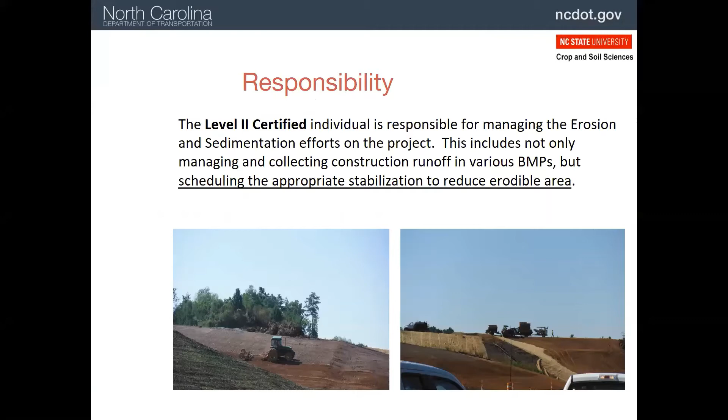So generally the level 2 person is the one who is responsible for ensuring that we get ground covers or vegetation established on areas in which there is no additional grading or there's a temporary stop in grading.

So in terms of how we get this vegetation established, first of all, we know that it's a very good erosion control practice. So that's why most of the non-paved areas around DOT projects will be grassed in order to stabilize and prevent erosion. So the long-term solution is usually a permanent stand of grass or other vegetation. And there can be other types of stabilization such as rock and concrete, but most areas are going to be grassed because that's the least expensive and it's very effective.

We are required by law to cover up slopes that are left exposed during the grading operation. And this has to be done within 7 to 14 days. So for many, many years, we've had to have a ground cover. And as I said, it could be grass, it could be plastic, it could be rock, it could be any number of things, just as long as you're restraining erosion. And then in 2019, we had part of our general permit indicate that we need to have this established within 7 to 14 days.

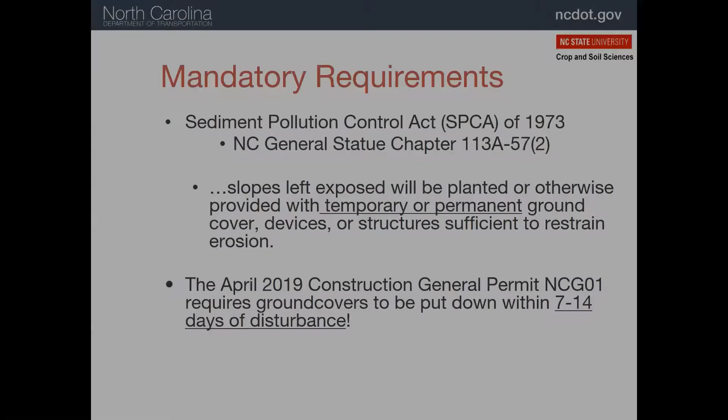So when is it 7 and when is it 14? Well, the high risk areas such as dikes and swales where there's water flowing or the perimeter of the project, those are all going to need to be established within 7 days after the grading is finished on those particular practices. Also, if your project or some part of your project is within a high quality zone, then those waters need to be protected, and we're going to have a 7-day requirement. And that will be on your plans. So whoever made up your plans is going to know what part of or what whole project is within a high quality water zone, such as a lake or a trout stream.

In addition, if we have steep slopes, steeper than 3 to 1, it's going to be a 7-day requirement because those can have a lot of erosion. Unless they're short, like only 10 feet or less, and then you can go with the 14 days. Slopes with 3 to 1 or less slope, those are 14 days unless they're very long, like 50 feet or more, because that can generate a lot of sediment. So those will be 7 days. And everything else is 14 days. So now you know, 7 or 14, those are the 2 time frames.

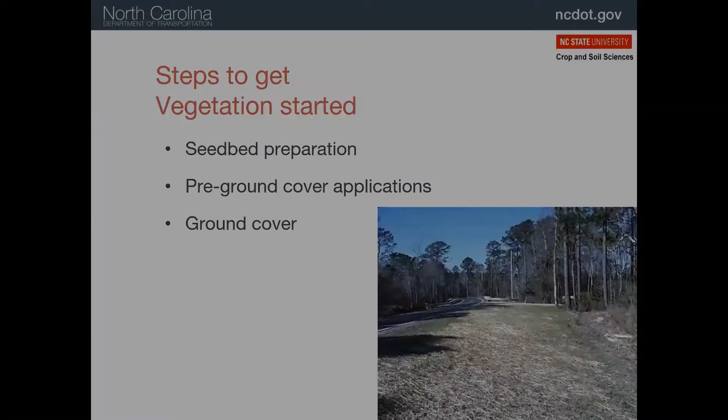So how do we get vegetation established? Well, we have to physically prepare the soil. We have to have certain amendments to the soil or pre-ground cover applications, and then we're going to need some ground cover. So let's go through these steps. First of all, in order to get the soil prepared, we want to smooth out the uneven areas, loosen the soil in some way. So this tractor is dragging a piece of equipment that will loosen up that soil. That allows the seed to germinate and penetrate into the soil.

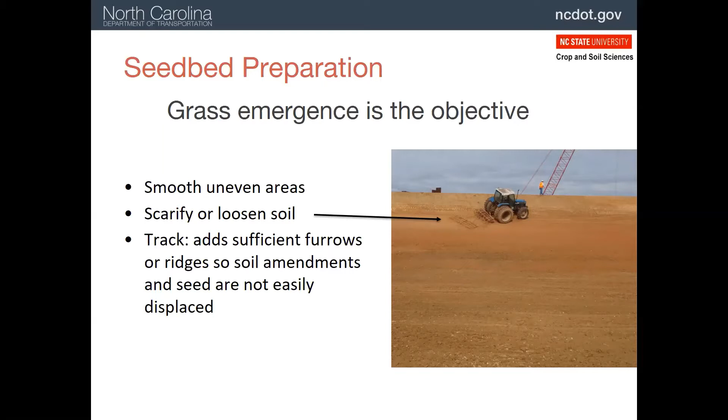And then we want to track. And this is an important process to establish little furrows and ridges, and this will keep erosion from happening by stopping the water from flowing directly down the slope. As you can see, as you track up and down the slope, you leave these little micro ridges, and that keeps the water from flowing too quickly down the slope.

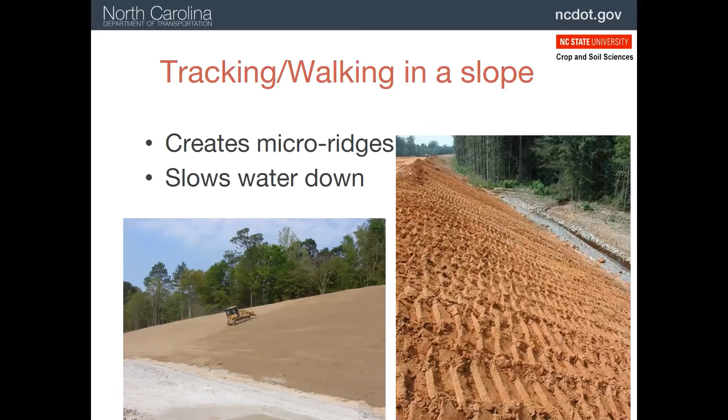So it's very effective. The seed generally will settle down into those little valleys and establish themselves, and we'll get a good stand. Make sure that you track up and down the slope and not across the slope. When you track across the slope, you end up with rills that follow those tracks, and you've actually accelerated erosion instead of slowing it.

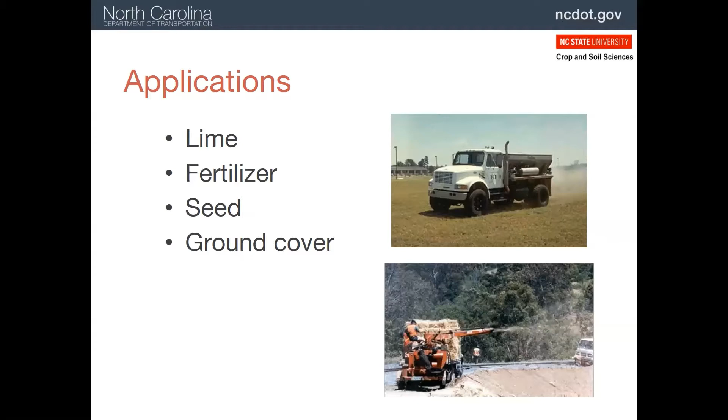Now, we need to amend most soils in North Carolina with lime and fertilizer, and then we add the seed and the ground cover. So let's talk about the lime and the fertilizer. Why do we lime in North Carolina? Well, most of our soils are acidic, meaning they have a pH of 5 or even lower. And in that case, plants just cannot grow, especially grasses. So we add lime and that brings up the pH, and we no longer have the toxicity of the aluminum in the soil, and the plants are able to grow.

We go with this blanket application of 2 tons or 4,000 pounds per acre. Now, there may be areas that need more, some that need less, but this will generally get the pH up to a point where the grass can grow. Whether you use powdered or pelleted doesn't matter. Powdered is better in terms of reaction in the soil, but pelleted is okay as well.

This particular blend is unusual, but it's helpful in establishing grass without having a rapid growth that you might want, say, in a lawn or on a golf course. So it helps the grass become established, but it doesn't need to be growing really fast and with a deep dark green.

So how much do we apply? We're going to go with 500 pounds per acre. So relatively low rate compared to lawn or other applications, but it's enough to get the grass established, and that's all we need is to get the grass established so it prevents erosion.

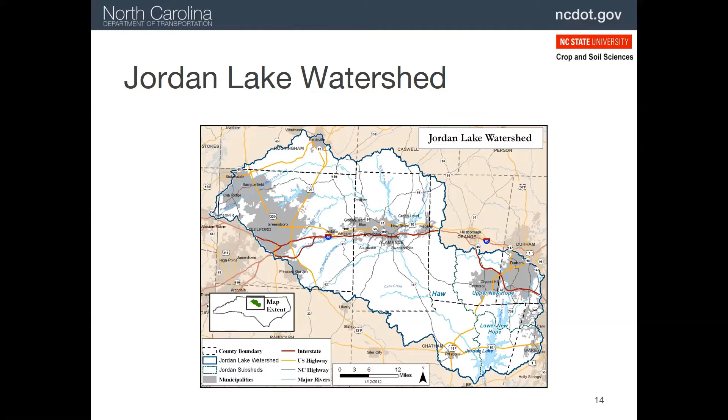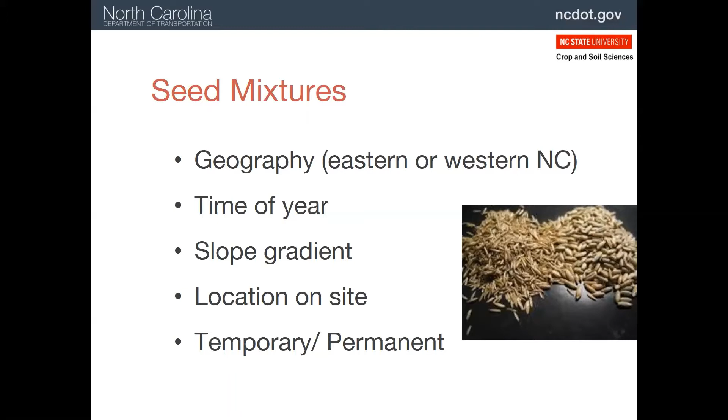All right, so we talked about fixing the soil physically and then chemically with lime and fertilizer. So now it's time to put out the seed. Now, the type of seed that you apply depends on where you are in the state, the time of year, what kind of a slope or area it is, and whether this is a temporary or permanent seeding. So we're going to go through all these different options for seeding.

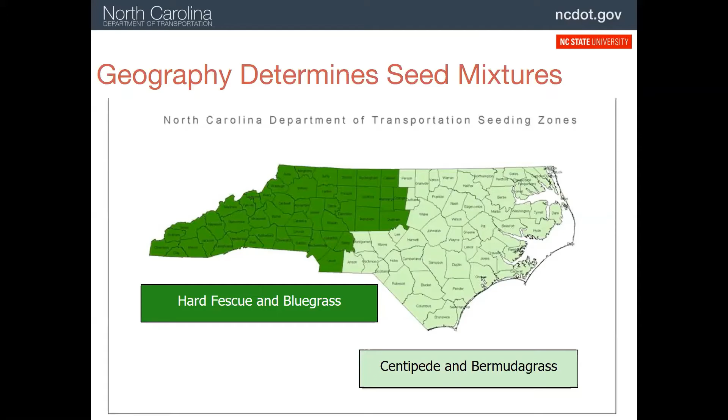So here we're going to go through some scenarios to give you an idea of how we would pick seeds. For example, Division 2, which is down east, and we finished our grading and it's April, time to put out some seed. We would put out 50 pounds of tall fescue. That's going to be sort of a nurse crop. We'd also then put out centipede and 25 pounds of Bermuda grass. Those are the warm season grasses that are going to be permanent.

So notice how we've said here a hulled Bermuda grass. So the seed naturally of Bermuda grass has a hard outer casing that helps it survive over the winter. However, if you apply it with a casing in the spring, that'll delay its germination. So in the warm parts of the year, we use hulled Bermuda grass. All right, and as I mentioned, the fescue, we already talked about how that's a cool season grass. It will grow in eastern North Carolina, but it's probably going to die out and the area will be taken over by Bermuda grass.

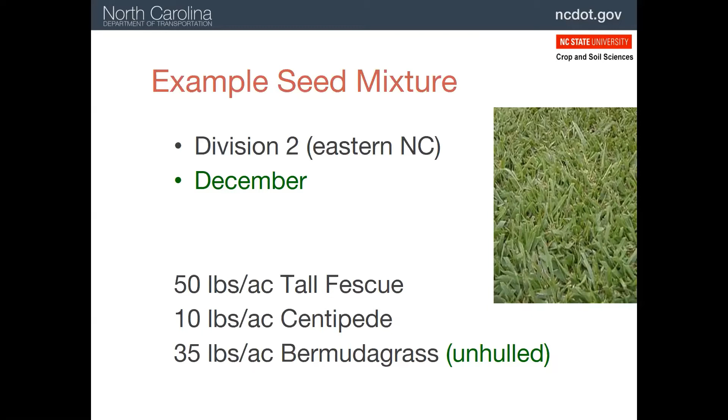Same area, we've had a delay. We're not finished grading until December now. So we're going to still use the fescue and the centipede and the Bermuda grass. However, we're going to use unhulled Bermuda grass. So the seed has not had the outer casing removed because we need that seed to survive the whole winter. So it's a little bit different mix, 35 pounds instead of 25, because we're probably going to lose some of that seed over the course of the winter.

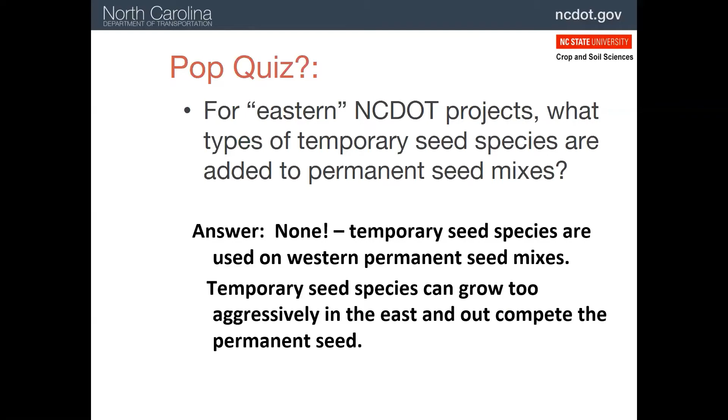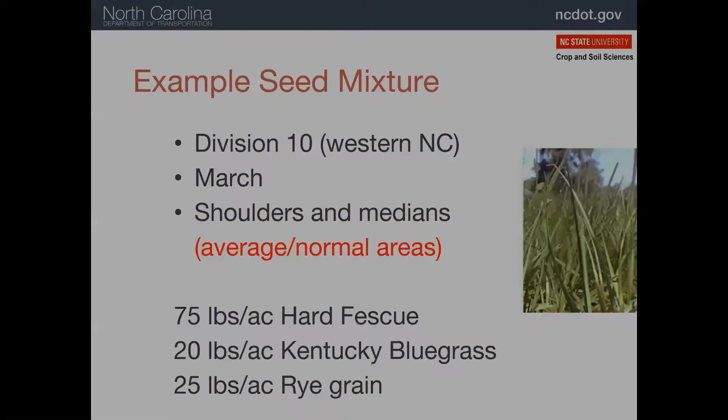So if you haven't seen the rye grain, you can see it right here. Very tall, it grows quickly, forms a seed head, but then it dies out and the seed never germinates. So it's a great nurse crop for the other species.

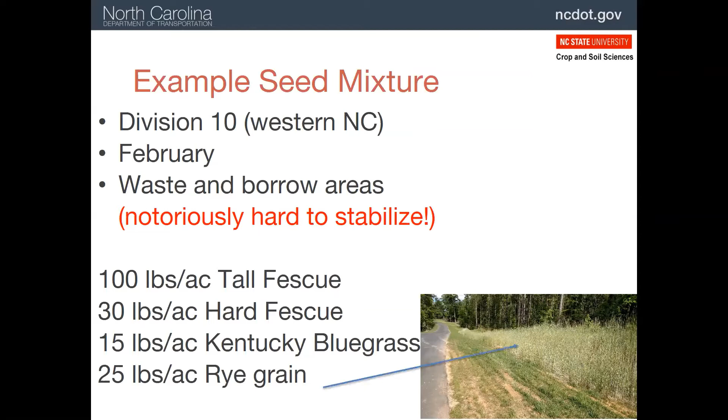Now, if we're in areas that are usually near wetlands or other bodies of water, we're going to go back with native seeding. And the reason we use native grasses is because this area has a lot more wildlife than we expect on other areas. So 50 feet on each side of streams and wetlands, we're probably going to be putting out native grass seedings.

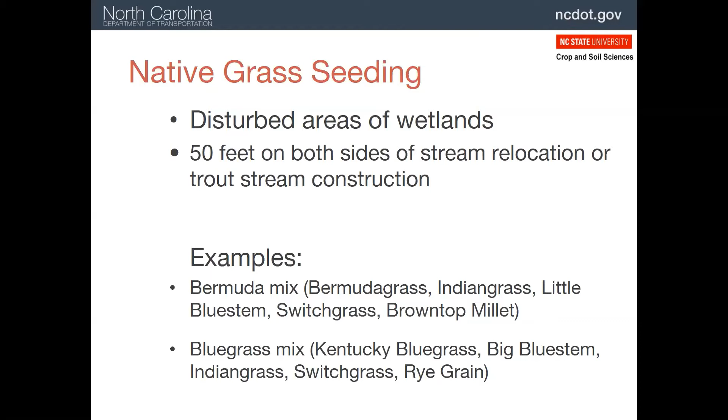So down east, that would be Bermuda with Indian grass, little bluestem, switchgrass, and millet. And in the cool season areas, we'd be using the Kentucky bluegrass with big bluestem, etc. So different seed mixes. These are very expensive. They're slow to establish, but we want to plant natives where we expect to see a lot of wildlife.

All right, so what are some of the problems we run into when we are trying to get vegetation established? One is inadequate cover, not enough of the cover material, whatever it is. For instance, straw. Didn't put enough straw out to protect the seeds. Poor seedbed preparation, that is compacted soil that has not been roughed up and scarified, or not enough amendments, didn't put enough of that lime or fertilizer out to correct the pH and get the fertility up.

Or you may have seed that's dead, essentially. It's expired. So every bag of seed is going to have a tag on it with a date, and that will be given to the inspector to ensure that you're using the most recent seed that you can get.

So we've talked about how we fix the soil physically and chemically, put out the seed, and how we select the seed. So now we need to protect the seed. So let's talk about different types of ground cover. Our standards would be straw mulch or erosion control blankets. And in some areas, particularly on steep areas or where there's water flowing, we might use a permanent soil reinforcement mat. There's other materials available like hydraulically applied mulch, or what we normally call hydromulch. Compost sometimes is used in small areas. And then we can add polyacrylamide to the mix to reduce erosion. And we'll talk about each of these in detail.

So the straw needs to be put out at 1 to 2 tons per acre, sometimes more. But the key is you need to get 85 to 95% coverage in order to protect the seed and get a good stand established. This is for slopes that are 2 to 1 or flatter. So steeper slopes need to have blankets or hydromulch. It needs to be uniformly spread, of course. If it's too thick in one area, it may kill the grass. And of course, if it's too thin, it doesn't protect the seed. So make sure there's enough to cover the area.

Straw actually has a lot of good properties if it's put out properly. It shades, it reduces erosion, holds the moisture for the seeds, allows circulation so we don't have diseases, and sunlight can penetrate in those little crevices in between the straws.

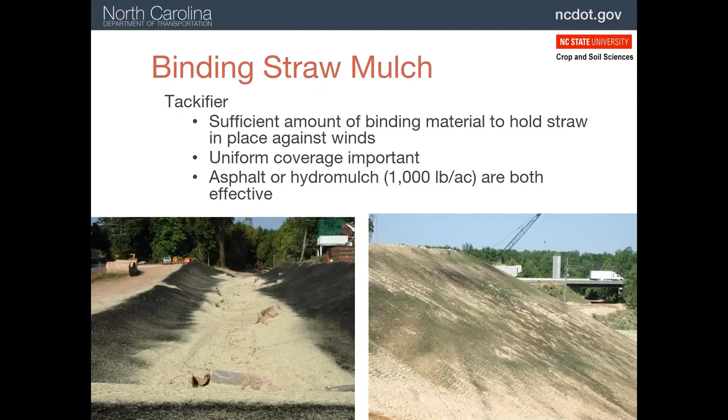However, straw has a tendency to blow off where you've applied it if you don't apply a tackifier. So often we will put out an asphalt material. We're transitioning to hydromulches at a low rate, and we'll get to hydromulches in just a minute, but those are very effective at holding the straw. There's other materials as well, but the key is to bind it together and hold it in place until the grass can get established.

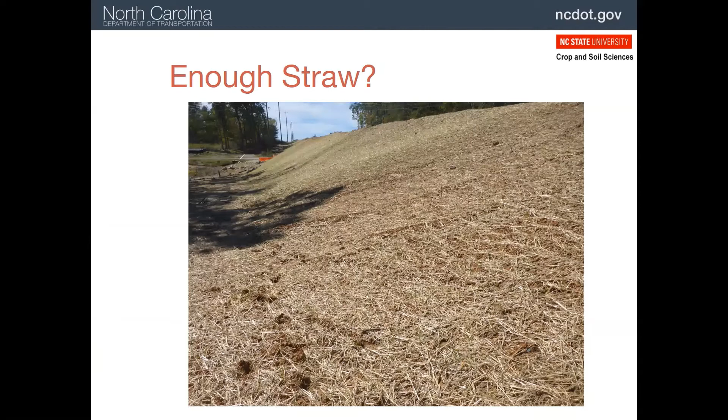Did we put enough straw out on this particular site? Well, if you look sideways, it might look like it. But when you get up close and you look down, you can see that there's a lot of soil showing, and that's a big problem. All the seed that's in those areas where it's bare is probably going to die. It's not going to be able to survive dry periods in between rainfall events. So this is probably less than half the amount of straw that you need to have to protect the seed.

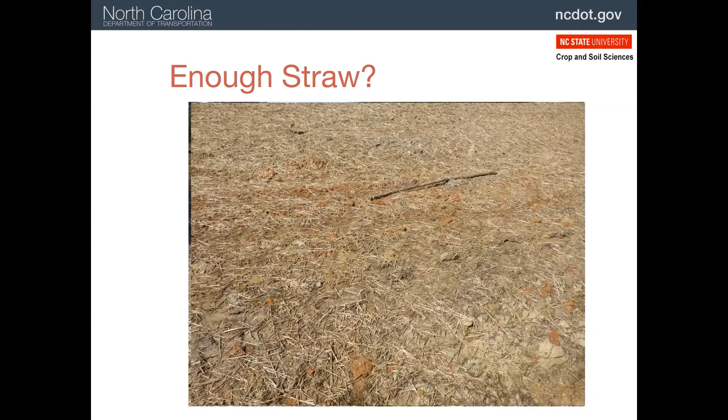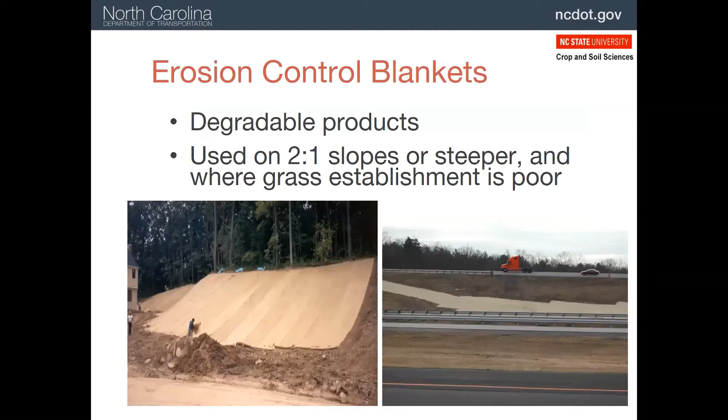There are many different kinds of erosion control products. Typically for DOT projects, they're made out of an Excelsior product. That's a curled wood fiber. You see the blankets in these pictures are Excelsior blankets. They can be on 2 to 1 slopes or steeper, or where we've had trouble establishing grass, which you can see on the highway on the right.

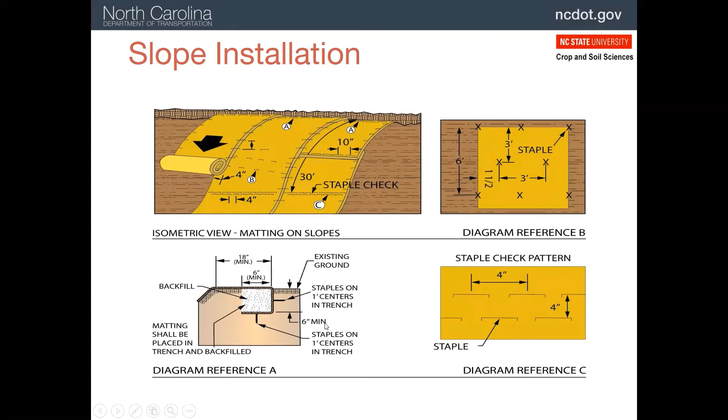If you're in a ditch, then you may be needing to do additional measures. For instance, as the blanket ends, you need to make sure the next blanket is underneath the uphill blanket so that water can't get underneath it. Again, stapling through both blankets to hold them in place. Very critical to have overlap between the blankets going down the slope so that water can't get underneath that either. So very critical that we get this installed correctly where there's flowing water.

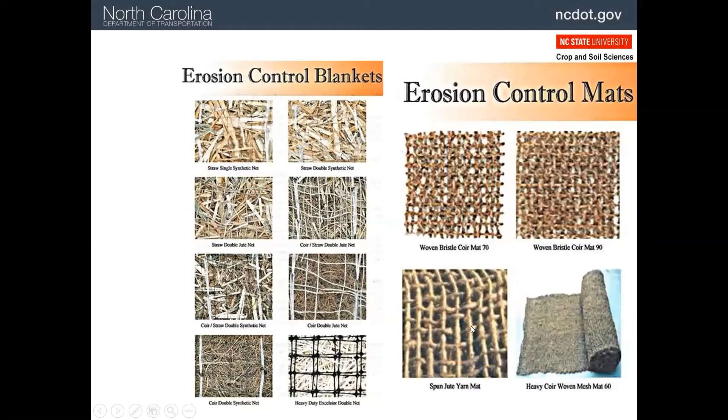There are many, many different kinds of erosion control blankets. On the left, you see many with a netting of some kind or another. Sometimes it's plastic, sometimes it's a fiber material. On the right, these are made out of a coconut or coir material. They do not have a netting. They actually are just woven together. And these are used mostly around streams.

As I said, the coconut fiber mattings are used around streams. That's primarily because they last a long time. They're made out of the same material that doormats are made out of sometimes. And again, it's because they are very rot resistant. They will eventually degrade, but it may take 3 years, 5 years before they are disappearing. And by then, hopefully there's vegetation all coming up through those blankets. Excelsior, as I mentioned, is the most common we see on DOT projects. There are straw blankets. They're the least expensive that are also out there.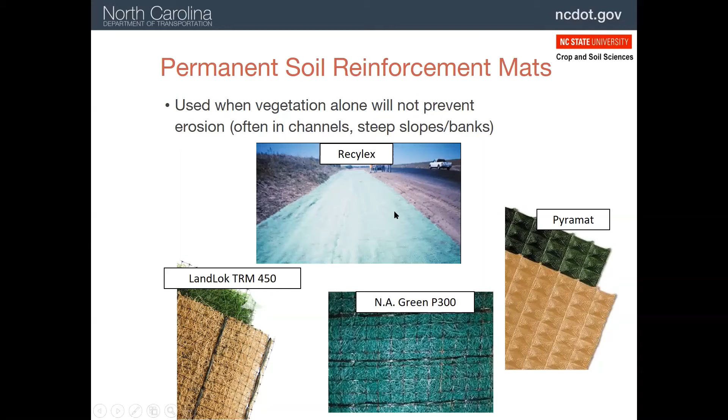If we're going to have a blanket instead of, say, a lining with rock, then we will use a permanent soil reinforcement matting, sometimes called a turf reinforced matting, because these will be seeded and grass will grow up through the netting. And as a result, between the two of them, they will form a strong enough bond to resist any kind of erosion in these ditches. There's many different kinds of them, but again, these are products that are much more expensive than the other types we've talked about, but compared to rock and a geotextile lining, which you might normally have, they may be actually a little bit less expensive.

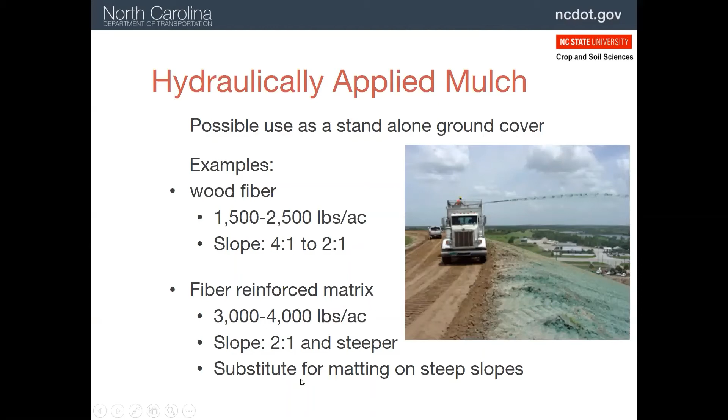Or you can go with a higher rate and apply it to different slopes, depending on the steepness of the slope, what material you might use. Wood fibers can be used on less steep slopes. And then they have these fiber reinforced materials. There's many different kinds of those. They're much more expensive, but they can be applied to steeper slopes at a higher rate. So what's really important is it's applied correctly.

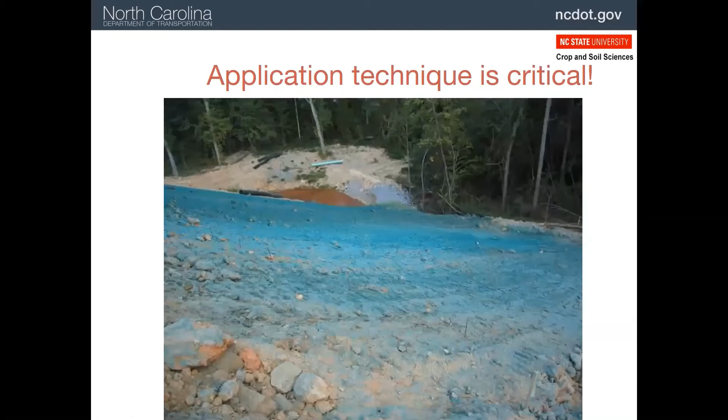So hydromulch needs to be applied both from the top and the bottom. This is a case where they're trying to apply it all from the top. And this is what happens when you do that. You look down the slope, you can see, well, it's still not a very good coverage, but when you look upslope, you can see the downhill side of all of those little trenches that we had with the tracking are not covered. So we've got essentially a 50% coverage when we apply the material only from the uphill side or the downhill side. So in this case, this is a truck that has a hose on it. They can reel out the hose to get down here to the bottom and shoot half the material up the slope, and they'll get the coverage they need.

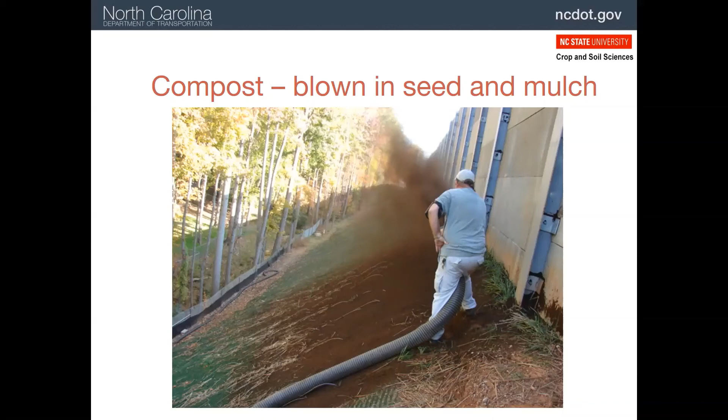Lastly, there's another ground cover that's occasionally used, that's compost. Sometimes the seed is actually mixed with compost and applied. You can see in this case, it's actually being applied on top of a permanent blanket. So this is not done normally because it's very expensive relative to straw or other materials. However, it is very effective and tends to grow grass quite well.

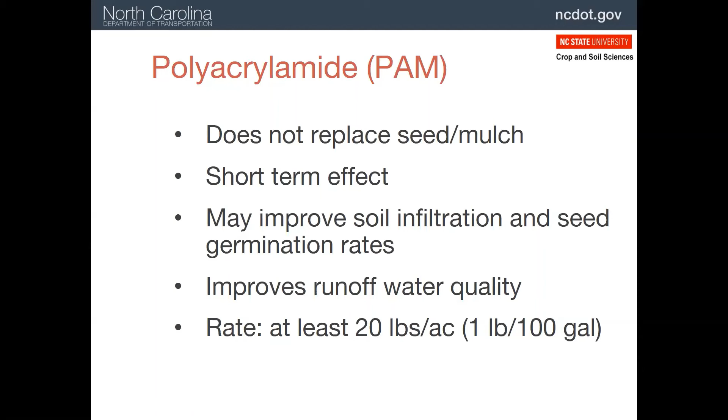We also have another material, a chemical called polyacrylamide, which we introduced earlier in talking about turbidity control. Well, polyacrylamide also can be applied along with straw or other materials that are used for erosion control to further reduce erosion. So it actually reduces erosion beyond the control that you would get with whatever else you're applying. So it could be hydromulch, it could be straw, it could be a blanket. So we generally will put out about 20 to 30 pounds of that, and we've seen pretty amazing results in reducing erosion and getting higher quality water off those slopes. I'm going to do a demonstration.

So we have just rained on these boxes of soil with different covers on them. We've been raining at a rate of about 2 to 3 inches per hour. So pretty heavy rain. And we've got different types of covers you can see. We've got straw, we've got a long-term blanket made up of coconut fiber and plastic netting, and we've got Excelsior with netting. So those are the 3 different types of cover we have.

In addition, we have applied polyacrylamide powder to these last 2 boxes, one with straw and one with Excelsior, to see what effect that might have on turbidity and erosion in these boxes. So our first box is bare soil, so you might call that a control, but it shows you just how bad erosion can be when you don't cover up the soil.

So we've collected the runoff, and here you can see how muddy it is. If you reach in there, you can actually feel some soil. So we've had a lot of erosion right here. Okay, and then our straw doesn't look a lot better. I don't have any sediment in here, so the heavy soil stayed in the box. It still looks a little turbid, but it's an improvement.

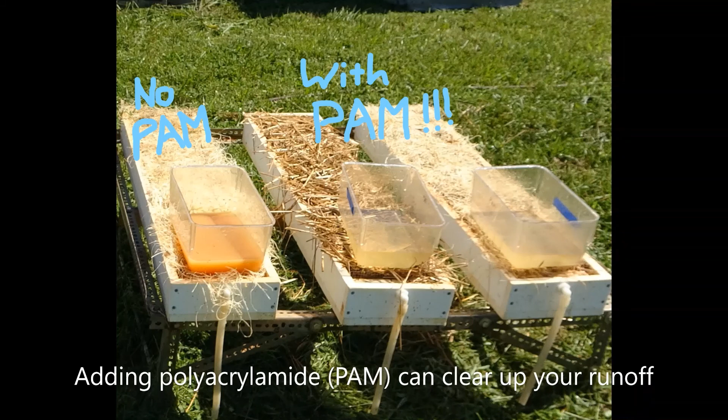So there are times when we're going to do temporary seeding. So that's when we've done our grading. We might be coming back to do some more, but it's going to be left bare for more than 7 to 14 days. So we need to cover that up with something, whether it's just straw or, depending on how long it's going to be, you may need to put seed out if it's going to be a matter of months or something like that.

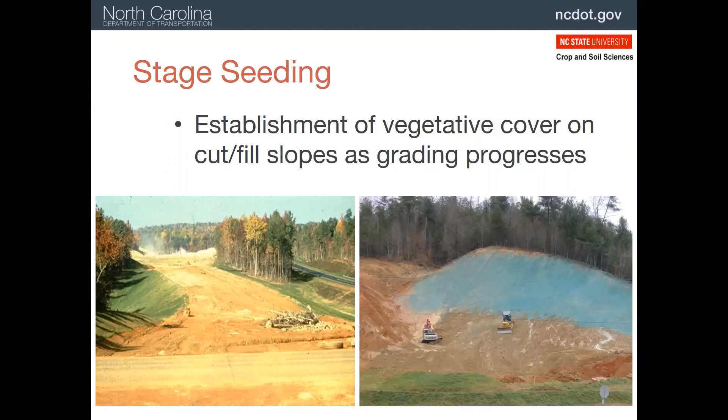We also, when we're done grading a part of a slope, we can do stage seeding. So here you can see on the left side, we've got a highway. The slopes going up to the highway bed are done. They're not going to be graded anymore. So we went ahead and got grass established on those. And then on the right-hand side, you can see they're moving down the slope, and they've finished the grading needed for the upper part of the slope. So they went ahead and sprayed some seed and hydro mulch out on the slope as they continued down and finished up the bottom of the slope. And this is a really good practice. Once you're done with an area, you might as well get vegetation established on it.

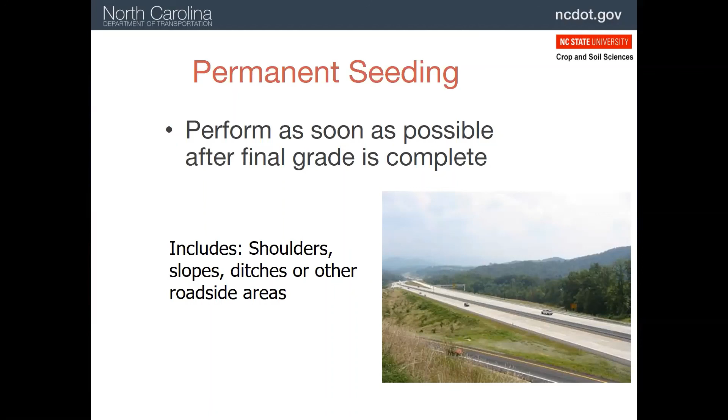And again, when we're done with slopes, we're going to have permanent seeding on there. And we want to get that out as soon as possible. We talk about 7 to 14 days, but the next day is even better. So we want to make sure all these areas are stabilized and we don't have a lot of erosion occurring. All right, well, I hope that answers any questions you had about how to get vegetation established on NCDOT projects.